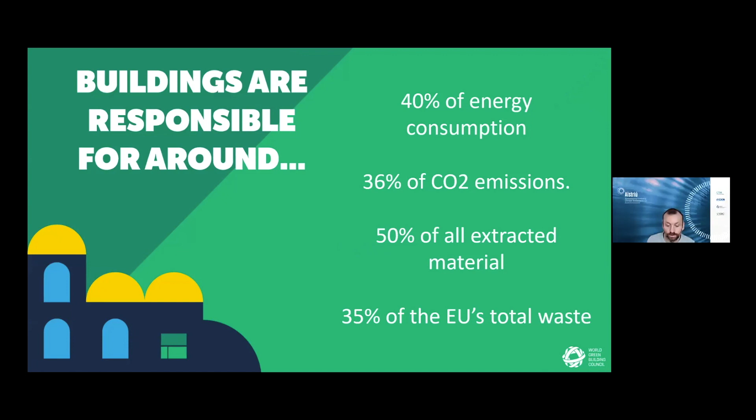Now, we all know that buildings are pretty impactful. They account for about half of everything we currently mine out of the ground, about a third of all our emissions, and about a third of all of the EU's waste. When we talk about whole life carbon, we're referring to the carbon emissions in the building materials, as well as those caused by energy use in the building during its useful phase. And it's these materials that I really want to highlight today.

London now requires whole life carbon assessments for planning permission. It's been written into the new London plan, and this is starting to proliferate as other cities follow suit. Finland is aiming for net carbon neutrality by 2035. There was a Chinese announcement at the end of last year announcing their net zero trajectory for 2060, and the US has just rejoined the Paris Agreement. So you can see how this is only going to become more important.

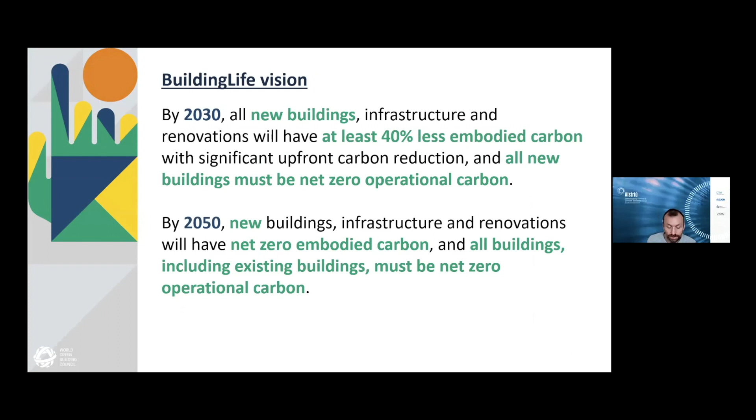Currently, the EPBD only looks at the energy use of our buildings, the operational energy, but of course, a building doesn't just appear. Its whole life cycle is much more. And although the operational energy is usually the greatest emitter in a building's life cycle, as we build better, more efficient buildings, this operational energy becomes less important and the other aspects of the building become just as important.

So I modeled a typical concrete block house, and this is what a new A2 rated home would look like today. I'm going to show you a few charts, but they're all based on this same data, just displayed in different ways. Today, an electric heated home with an A2 rating, which is 50 kilowatt hours per square meter per year, would have a carbon cost of around 9 kilos of CO2 per year.

This factors in everything: electricity generation and transmission, the fossil fuels that are still used in the grid. The National Planning Framework has a target of 500,000 new homes by 2040, and these all need to perform at this A2 rating. So as the grid decarbonizes and becomes more efficient, we would expect the 9 kilos in this operational energy portion to reduce.

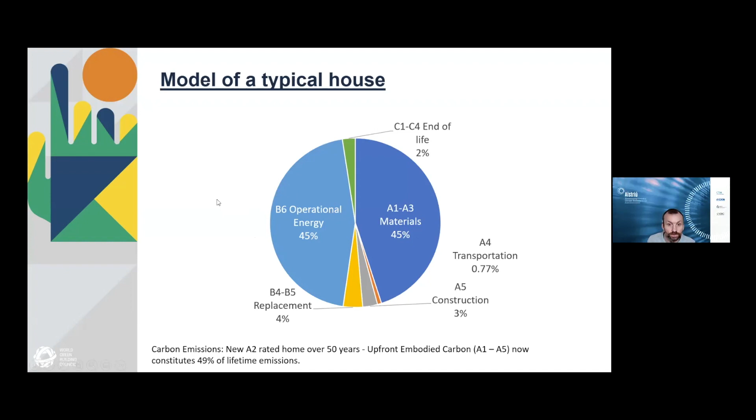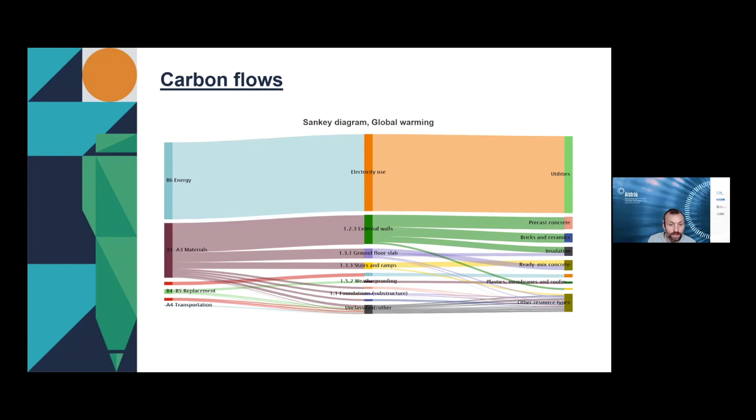Now, the problem is they are happening right now. They're not spread over the future and based on a decarbonizing grid.

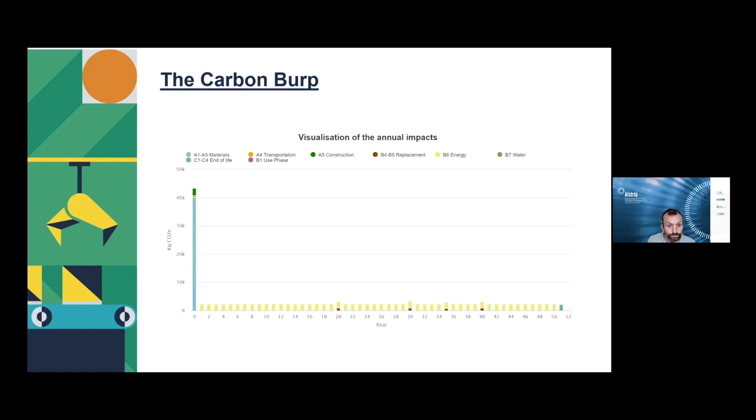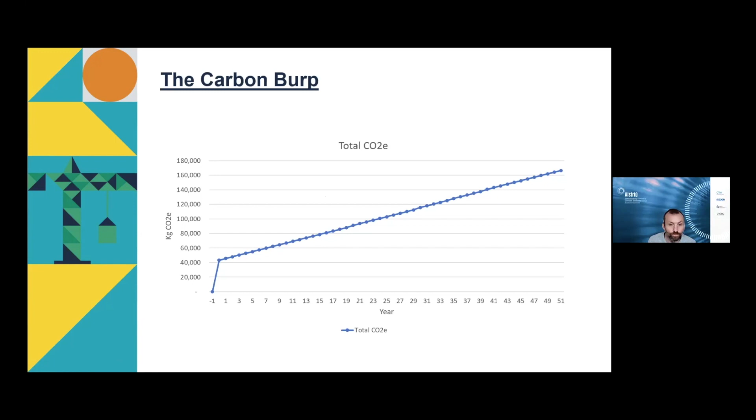So the problem, we're not really aware of our own impacts. So I'm going to try to relate them to something that we're all more familiar with. The average car sold in Ireland in 2019 produces 122 grams of CO2 for every kilometre driven.

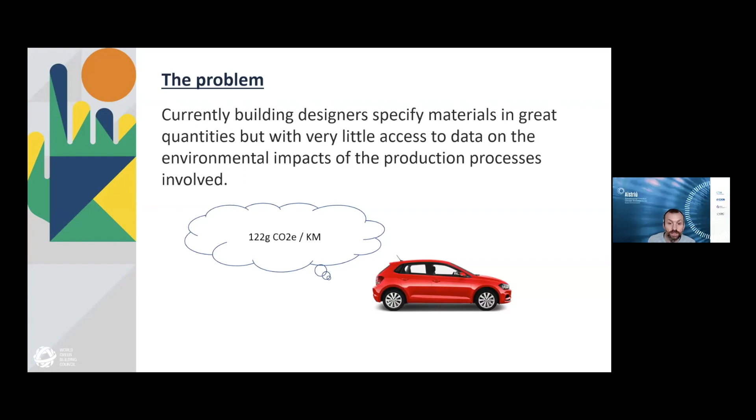So we're going to take a look at some of our key building materials and see how they stack up with this. So here's our car, 0.122 kilos of CO2 for each kilometre. So if you compare that to a kilo of concrete, a kilo of concrete is about the same as driving your car 800 or so meters down the road.

I should say that throughout this, there is variance. Just as you would get variance depending on the model of your car, there'd be variance in the concrete and all the other different materials that we're going to look at based on the energy mixes used to produce them or where the raw materials were sourced from. But everything I'm using here today is an average drawn from groups of comparable EPDs or modelled using average background data.

So here we have a brick, just one brick, the same as driving your car about almost 4 kilometres. And I'm told that we use about 70 million bricks every year. So that's about 250 million kilometres of bricks that we use every year.

The mortar that holds them together, just 1 kilometre. And concrete blocks, the same as driving 46 kilometres in your car. So you can see what I'm trying to do here. I'm just trying to show you the things that we take for granted and give you an idea of what it really takes to get them ready for site.

So back to our car. Now this slide highlights the importance of recycled content. A kilo of structural steel beam requires more than 3 kilos of CO2 emissions to produce, but this can be reduced drastically with increased recycled content or looking into alternatives. And of course, alternatives sometimes come with extra benefits.

So a kilo of timber will sequester over a kilo of carbon dioxide. It draws the carbon out of the atmosphere and uses it in its growth phase and leaves that oxygen element where it is.

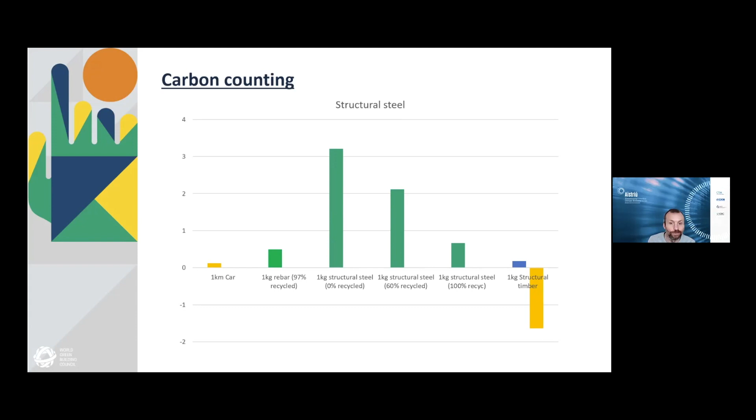So aluminium for facades and windows, it's great for weatherproofing and it's light, it's infinitely recyclable, but the production method requires huge amounts of electricity, even when some of the content is recycled. It also comes with some other pretty nasty side products too. There are great pools of this useless red sludge dotted around the world as a result of our aluminium production, but they're out of sight, so they're out of mind.

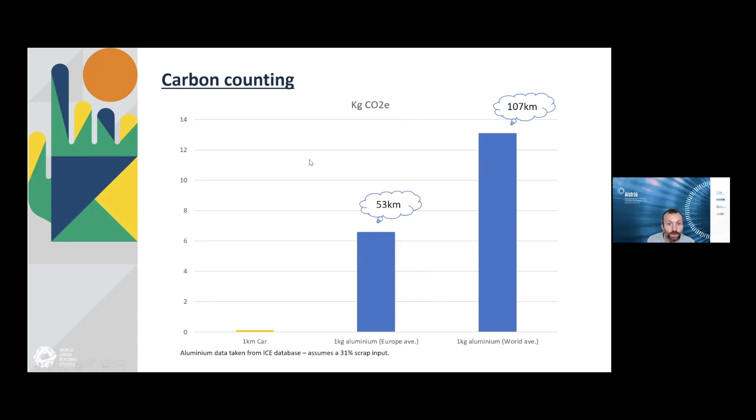Last one, our insulation. So wood fibre has about the same carbon cost as EPS, but it also absorbs carbon as it grows prior to harvesting. So this cubic metre could balance out around 860 kilometres of driving emissions, even after you take into account the emissions that it cost us in producing that cubic metre. So this sequestration is important and we need to hold on to it as long as possible. We need to think about how we can reuse it after this building has served its purpose, after it's deconstructed. Because if it's incinerated, then the sequestration is lost and we're back to square one. I think Mirko's going to talk a bit more about buildings as material banks and the circular economy. So I'm just going to leave that there for the moment.

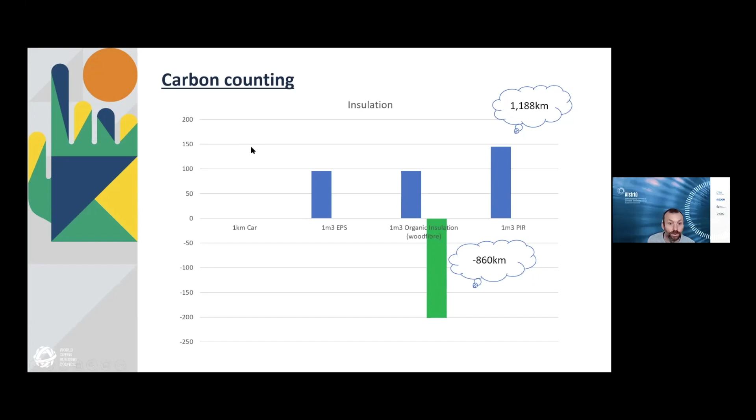Now, everything I've shown you has been simplified, and there could be 100 other reasons for choosing or not choosing a specific product. But I just wanted to clearly show the difference in one property, the carbon cost. All the materials' other properties would also influence the decision making.

This final bar chart shows an external wall build-up using CLT and the same external wall using cavity concrete blocks. This one's in percentages, so the worst performer is 100% on each chart. And you can see in the first chart, the GWP, global warming potential, this is the carbon, that can be reduced by 70% by switching to CLT, but there are other environmental impacts. The CLT performs worse on the ozone depletion potential, for example, in this case.

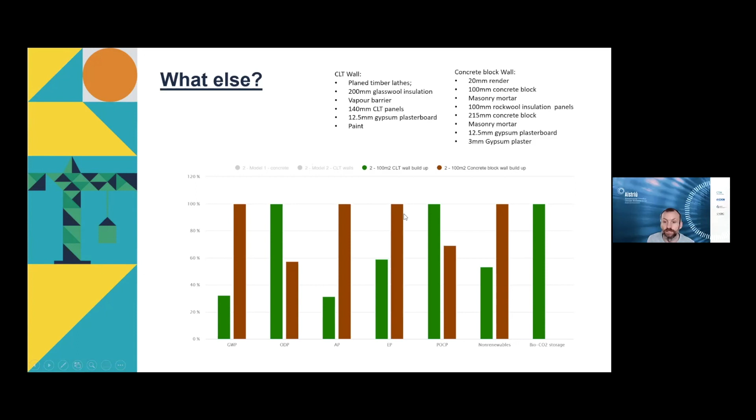The carbon indicator is usually a good indicator for the other impacts, but it's not certain. So we have to tread carefully. And you can see on the right there that the CLT obviously does have that sequestration benefit too.

So where do you find all this information? So everything I've run through is based on data. I've used averages, either the average from a group of EPDs or a result of a generic LCA study of the material. Using an average at the beginning of your building design, before you know who the specific supplier will be, can give you an indication of what your final result is likely to be. But data varies hugely across manufacturers, across regions, and across time. So there are a few things you need to keep in mind.

The best source of data of a building material or a product is the EPD, the environmental product declaration. And this is what we would like to see building designers and specifiers demanding from their material suppliers. We want to see these becoming a real differentiator in the decision-making process. And the most accurate information you'll get is from an EPD that covers a specific product from a specific plant. So use that once you know that that product and that product alone is definitely being used in your project.

Failing that, there are EPDs that cover groups of products, either all from one manufacturer using a similar process, or trade bodies that produce EPDs to cover the products of all their members. But there's less certainty here. As you zoom out from a specific plant, then you lose accuracy. And the other thing is time as well. How old is your EPD? An EPD has a valid lifetime of 5 years. After that, it's deemed to no longer fully reflect what's going on in the production process.

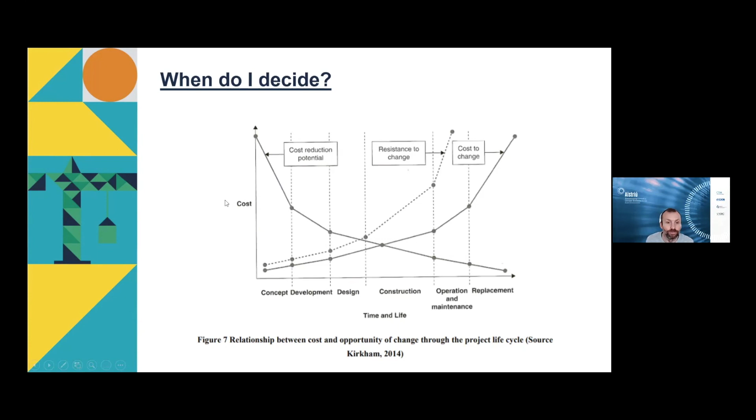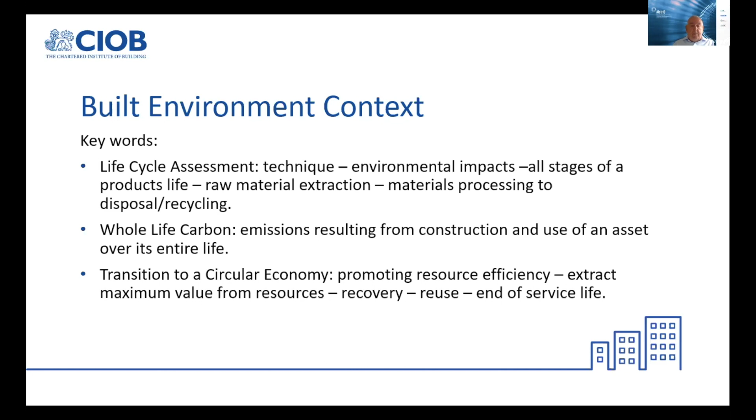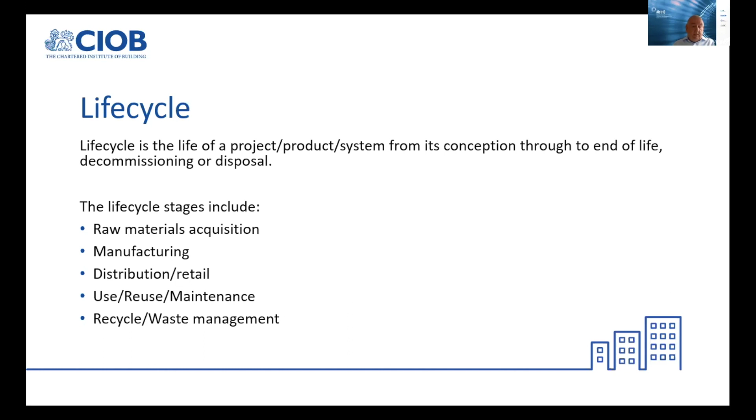The main purpose of life cycle assessment is to identify where improvements can be made to reduce the environmental impacts of a product or process in terms of energy and raw materials used and wastes produced. Next slide, please.

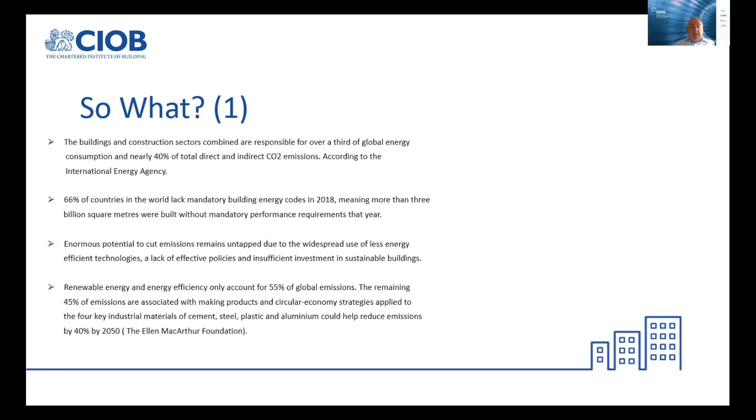The next two slides establish that there is a wealth of international briefing documents, statistics, and reports that communicate the issues involved in thinking about the required changes from business as usual. These are various research statistics that I have looked at researching for this presentation. The Ellen MacArthur Foundation was launched in 2010 with the aim of accelerating the transition to the circular economy. Next slide, please.

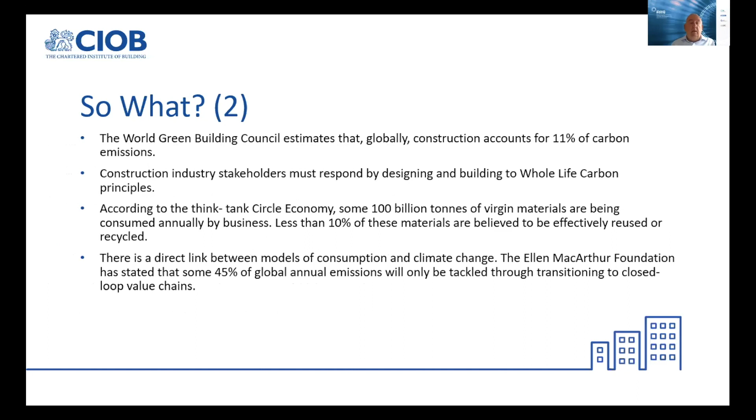Again, you've got the World Green Building Council estimates, you've got various think tanks, and again, there's an excellent report which is in the list of my recommended reading at the end of the presentation from the Ellen MacArthur Foundation on the circular economy. Next slide, please.

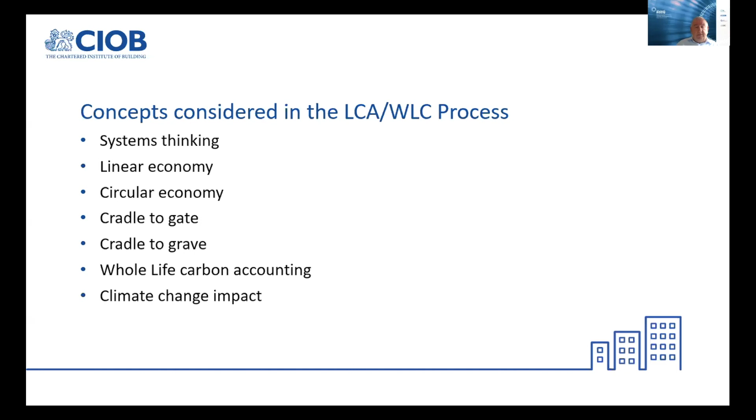Concepts that we've got to consider in this process are listed, but top of the list is systems thinking. That's extremely important, that we actually consider the design process as part of a system, an integral part of the whole system that is tackling climate change in terms of adaptation and mitigation and delivery of buildings and assets that will contribute to changing the status quo and moving on to a decarbonised path at net zero. Next slide, please.

The more sustainable world is largely dependent on rock-borne substances called rare metals. According to Guillaume Pitron in his book, which I've referenced at the end as one of my recommended reading lists, The Rare Metals War, the potential demand for rare metals is exponential. We are already consuming over 2 billion tons of metals every year, the equivalent of more than 500 Eiffel Towers per day.

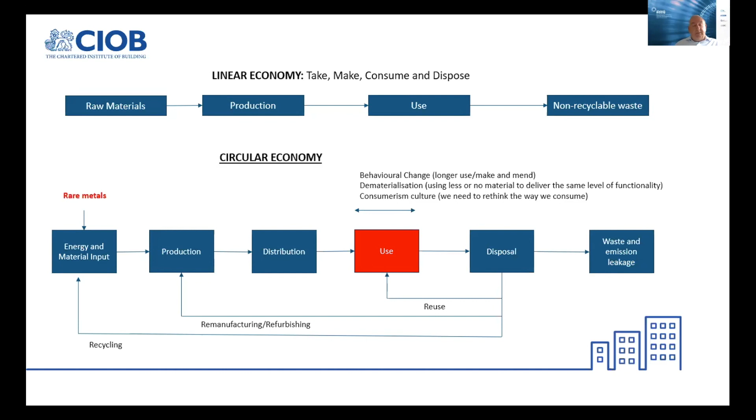We'll get onto this later in the conclusions, that we've got to change the way we consume. Because if we don't change the use within the economic model of the closed loop system, we're not going to achieve much in terms of meeting any targets. It's the human element of what can be a design problem, but design is an integral part of a larger system. Next slide, please.

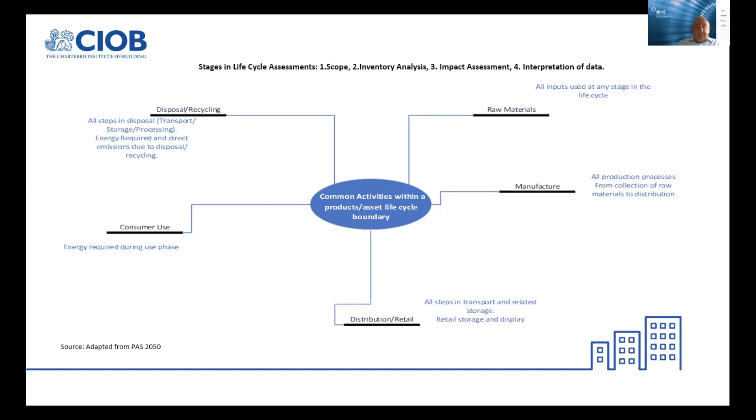What I mean by that is that, according to Aristotle, and I've got no reason to doubt him, the whole is greater than the sum of its parts.

Life cycle and whole life carbon thinking is part of a larger system that will help us understand both embodied and operational carbon within the built environment system, which is a subsystem of achieving the net zero carbon targets, whichever country you live in. The UK Committee on Climate Change's sixth carbon budget includes industry sector pathways to net zero for the manufacturing and construction sector, which is a system within itself.

But what is important is the system boundary, because if any part of the system contained within the boundaries is changed, all the other inputs and outputs will also change. Next slide, please.

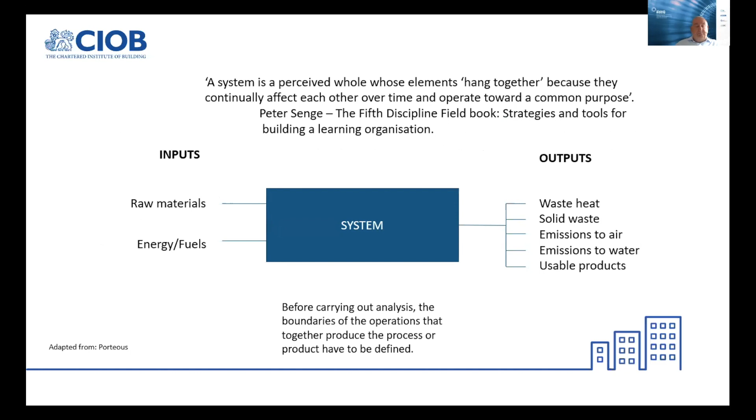Inventory analysis involves the collection of data about the products or services being investigated and the quantification of relevant material and energy inputs and outputs.

Impact assessment generally involves evaluating data collected on the material and energy inputs in terms of their potential environmental impact. The interpretation of data combines the findings from the inventory analysis and impact assessments to allow conclusions to be drawn and recommendations to be made.

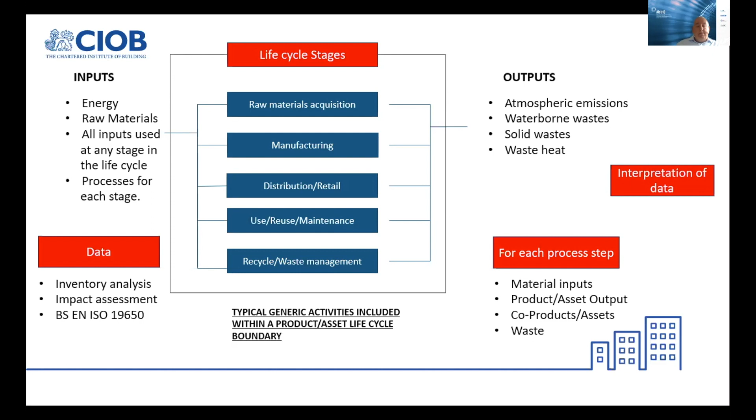Embodied carbon is sometimes referred to as capital carbon, referring to the emissions associated with the creation of an asset. In terms of buildings, the embodied carbon used to create a building may be as high as 62% of its total whole life emissions for some building types. As was mentioned previously, the relative significance of embodied carbon is increasing as both the grid decarbonizes and operational emissions decrease due to increased efficiency, according to the UK Green Building Council.

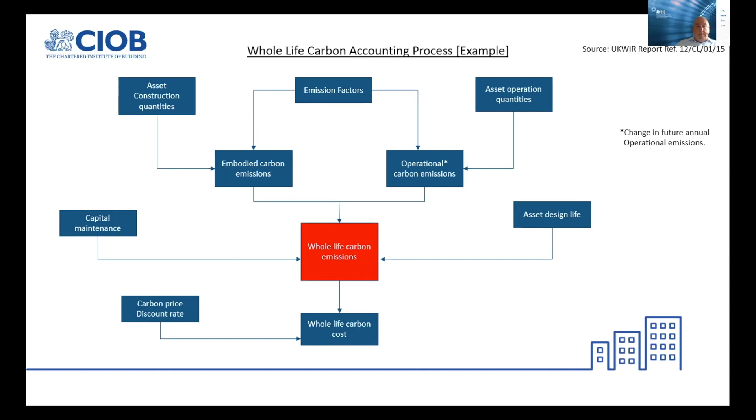Next slide, please. The CIOB has published the Code of Practice for Project Management for Construction and Development. Within that document, an excellent document of best practice, briefing note 2.01 on sustainability issues recommends key actions, and those key actions involve life cycle impacts on materials and equipment, which must be considered by the project team, as well as the selection of construction methods.

Another key action is to make the project team aware of the principles of designing for deconstruction and consider the whole life of services components for recycle or reuse at the end of their life. This is part of a series of briefing notes, best practice checklists, designed to make sure that all elements of sustainability in terms of project management are considered by the project team.

So this is now being embedded within best practice formally rather than via CPD and training courses. This document should be the Bible for a project manager in construction and development. Next slide, please.

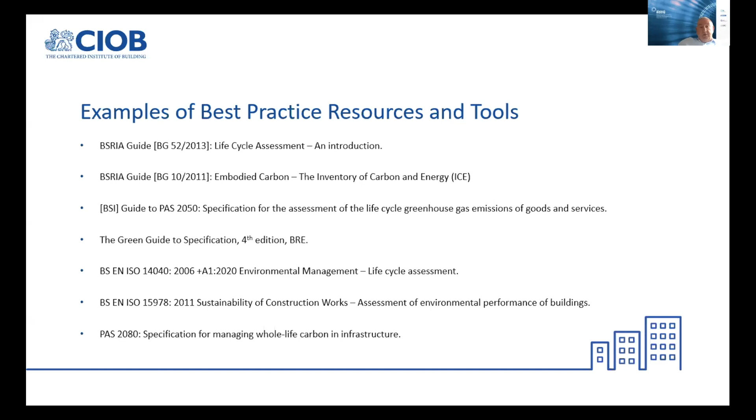The Green Guide to Specification by the BRE, ISO standards, and PAS 2080, which is the specification for managing whole life carbon in infrastructure. The list is not exhaustive, and there are common elements of these resources, tools and techniques that apply across the board. Next slide, please.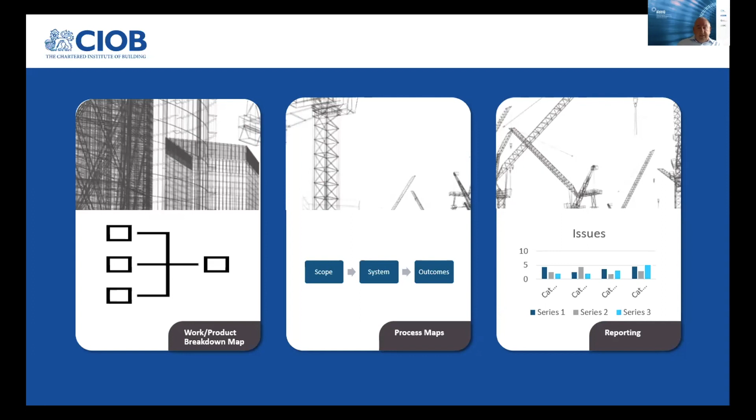These are required tools and outcomes that bring the thinking process into reality. Work/product breakdown maps, process maps, and reporting are crucial in terms of the exercises that have to be done. Again, there are lots of tools and techniques. I've just chosen those three because they are fundamental to the process as a whole. Next slide, please.

There are many databases and services listed on the internet. The process is well established. These are some example tools that you can find on the internet. It includes BRE databases, and various other national and international databases in terms of what supporting tools you can actually discover and use on embodied energy and carbon, environmental impact indicators.

The BRE Impact Database for construction products has probably 350 data sets that are compliant with the British standard, which is compliant with the EN standard 15804. So it's out there. There's tools out there. It's not really the question of the tools. It's the thinking behind the tools, and that thinking actually is a small component on a system and subsystems to achieve the objectives of impacting on climate change.

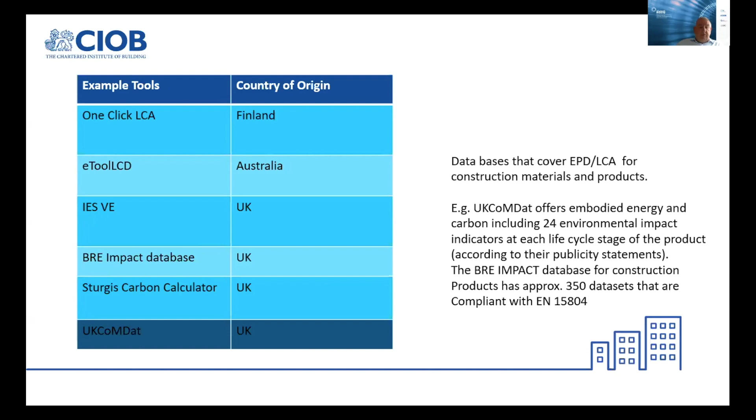Next slide, please. So what do we make of the thinking behind life cycle and whole life carbon? What does it mean? The key drivers moving forward must be keeping up with innovation, digitalization and communication, systems thinking.

Personally, we have to keep abreast of the situation and developments through continuous professional development and behavioural change. We're talking about people here, and there's a danger of getting too technical, talking about the mathematics of design, designing embodied carbon and considering operational carbon. But we are talking about people and their behaviours. What's changed in general behaviour, what's changed in business as usual. And basically, a really big impact that is not usually considered is the consumers of the results of various exercises on life cycle and whole life carbon.

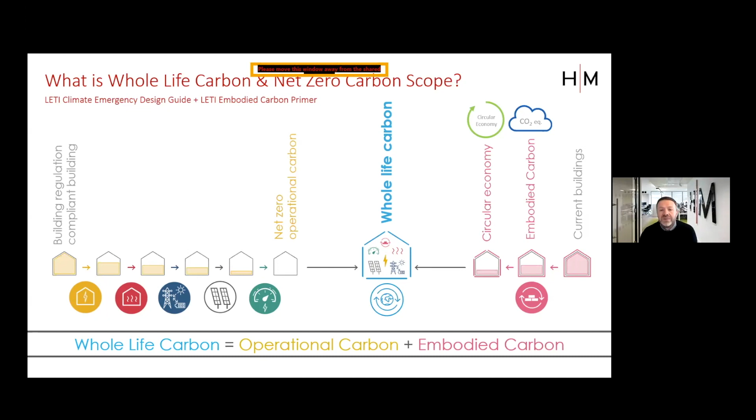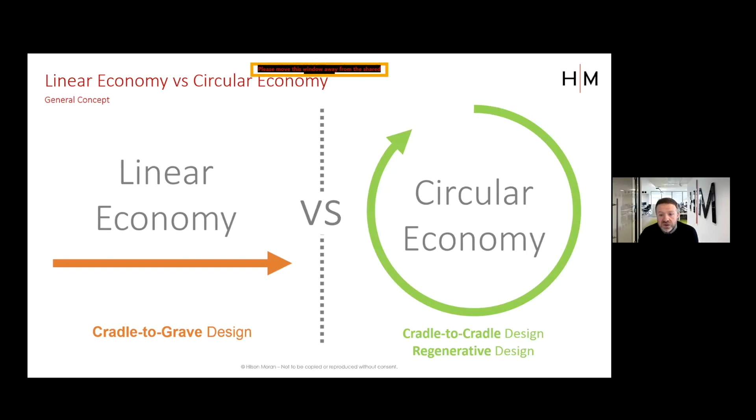What we basically recommended was that every building, from now on, should be built using reused material, and a big part of the building elements should be reusable at end of life, so that a group of building elements could be used in next lives. We are in this transition period at the moment, because we are basically in a system called the linear economy, and gradually shifting to what is called the circular economy.

This is a more in-depth visual for explaining the concept. As David and Stephen have anticipated, what you can see here is that the top is the linear economy, which is typically taking resources from nature, using all the resources for production of products, use, and then waste everything.

The circular economy concept takes into consideration that resource extraction should be minimized, and at the end of life waste should be minimized as well. What is possible to achieve those two aspects is to basically keep as much as possible of products and building parts within the loop.

All of these actions can be done by going for a few strategies, in terms of building element systems and so on. It's possible to do maintaining and repairing building parts, perhaps reusing building parts within the building throughout its life. It's a good idea to go for remanufacturing of building elements, and recycling is another very good aspect for it.

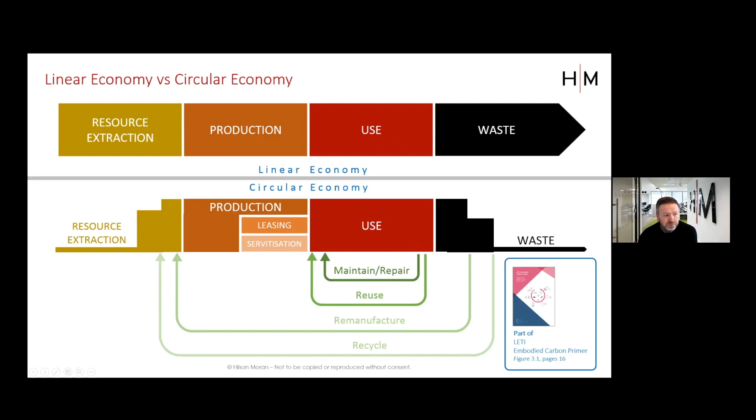If you'd like to read more about all of this concept, you can double check the LETI Embodied Carbon Primer, which is available online. Going to the next slide.

I'd like to introduce this project because it was a very interesting project I was involved in when I was at BRE between 2017 and 2019. I was mainly involved in this research project, funded by the European Union, as the life cycle assessment lead for the environmental evaluation module of this project, called Building as Material Banks, or BAMB2020.

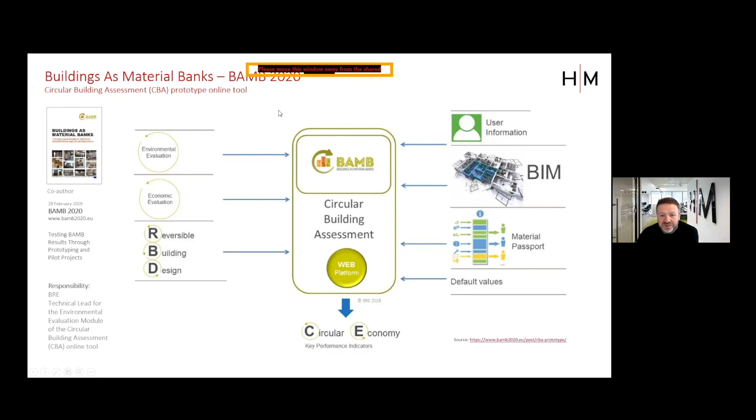In the meantime, I was working on this project. There were a few pilot projects that were going to be developed, and particularly one of the pilot projects was this particular building.

Which is called the BRIC. And this particular building was basically designed to be fully demountable at the end of life.

And of course, the main goal was that it would be possible to reuse the majority of the parts of the building for building another building at the end of life.

Now, the main goal of this research project, particularly for this pilot project, was that the building was able to be built.

For example, as the configuration of BRIC 1, then to be demounted at the end of life, and then of course to use all the parts coming from BRIC 1 to build BRIC 2.

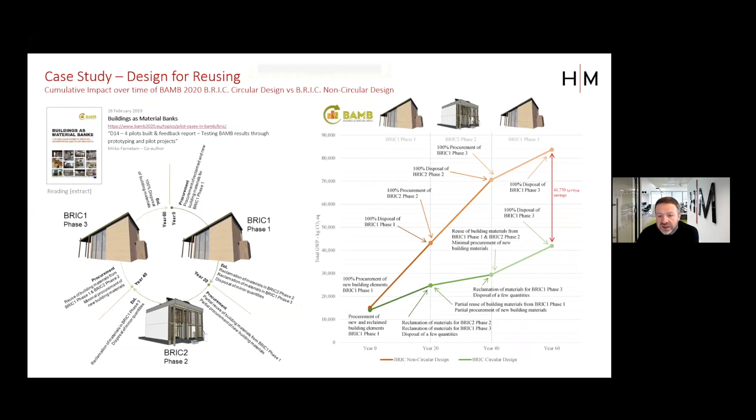But in this case, obviously, it is applied to a real case study, let's say so. So in this case, we basically were appointed by a client that basically would like to have...

They would like to apply, you know, cradle-to-cradle principles for developing new buildings in their portfolio.

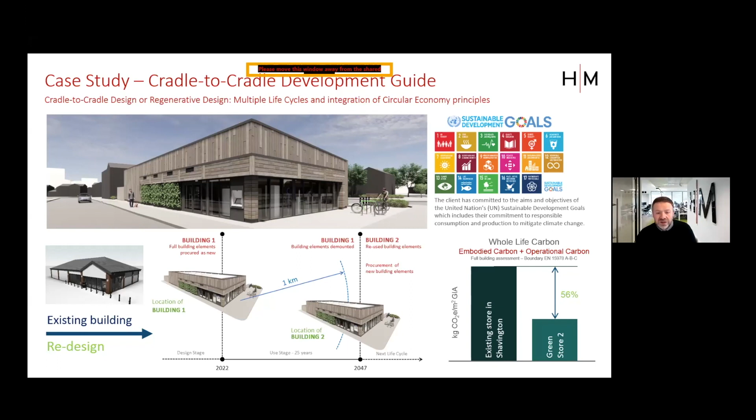But I think what is important as well is that there will be an economic benefit, because if this building here is built by an owner and occupier, of course, the capital cost will be high at the beginning. But in building the second building, the capital cost will decrease drastically because a big part of the building elements will not need to be sourced. So together with embodied carbon saving, there will be capital cost saving as well, and I think this is very important for a developer.

And that's it. Thanks very much.

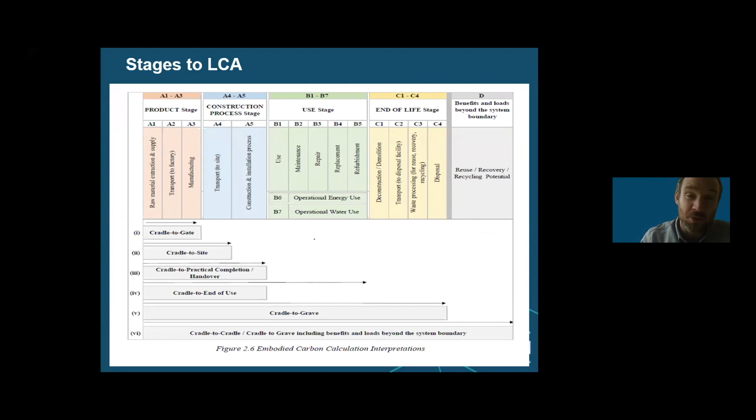So that is what we're essentially concerned with from a construction and operation point of view in relation to our life cycle analysis. Looking at embodied carbon - why is it becoming important?

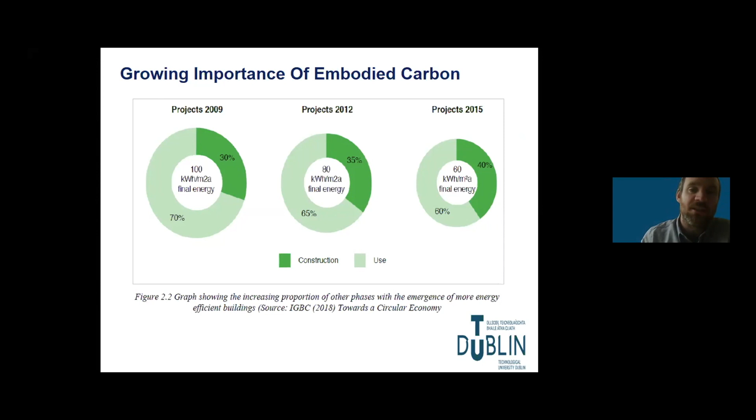As we sort out - and I'm not saying we have sorted out, certainly not in our existing construction or building stock, but from a new build point of view - as we move towards more of a zero carbon operational point of view, embodied carbon on our new builds is becoming more and more important. We could get zero carbon from an operational point of view, but if we're using a lot of steel, a lot of concrete, the embodied carbon in our buildings could be quite excessive. So embodied carbon is becoming more important, because what was the majority of our carbon produced through the operational phase is now getting dealt with. Our embodied carbon in terms of the manufacture, construction, and use during construction of those building materials is becoming more and more important.

Just to give you an idea of embodied carbon at the moment - this is a 2017 analysis of an office building versus a warehouse versus a residential construction, over what I believe is a 60-year period in terms of a life cycle analysis.

The embodied carbon of your office building is again about 60% of the overall carbon content, which includes the whole life operational carbon as well. Warehouse is a good bit more, and that is probably to do with the building materials used, be it steel construction or concrete construction.

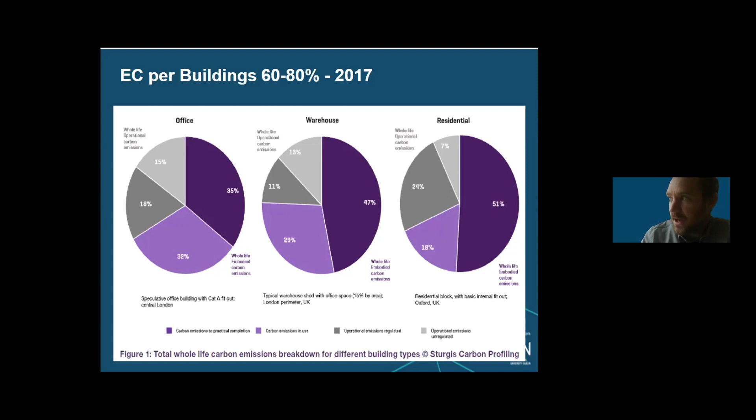And your residential is up there about 70%. So between 60 and 80%, embodied carbon with new builds is pretty much the focus now, as we get sorted in relation to operational carbon. So as quantity surveyors or construction professionals giving clients an idea of one building versus another, in terms of a more sustainable option versus something more traditional, we're using building materials that tread lightly on the environment.

What kind of methodology should we use? Well, the RICS, the Royal Institution of Chartered Surveyors, I'm using their methodology in lieu of something that possibly isn't completely related to my profession, using their direction. They're saying to use the breakdown structure that we use as quantity surveyors in our elemental breakdown, which is quite useful because that's the way we put our cost plans together.

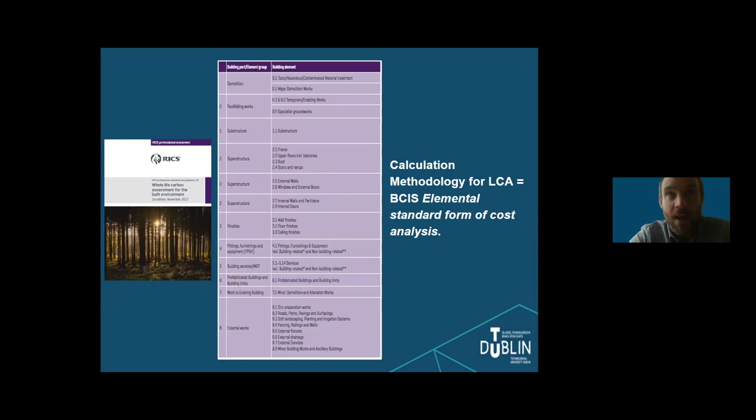That's the way we put our bills of quantities together. So if we have that information and that quantification, what we're trying to do is essentially use an embodied carbon unit rate, rather than a monetary unit rate. So we have the methodology already, we've been doing it forever, and it's just a matter of changing that practice a little bit for carbon counting.

So this is a bill of quantities, might be a little blurry, apologies for that. But essentially it's a good detailed breakdown structure. The units on the left-hand side are assigned a quantity, and then obviously they're assigned a rate, and that rate times the quantity gives us our cost.

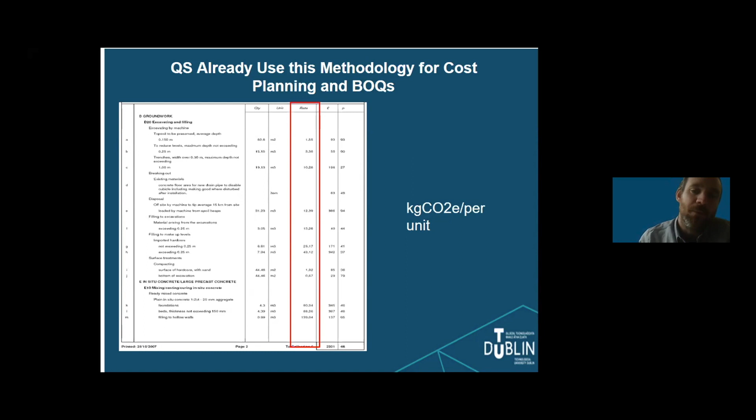So if we imagine using a kilogram of CO2 equivalent per unit, multiplied by its quantity, that will give us that unit cost for each particular item. So as quantity surveyors, if we take it on an item by item basis, because we've already got our bills of quantities and our cost plan, we can pretty easily and quickly build up a bill of quantities for embodied carbon.

This kind of just outlines digitization and where we might go and how we might leverage it. Again, a bit of a pet interest of mine from a digitization point of view, your building information model. There are plugins to the likes of Revit that you can use that have databases attached to them.

So certain software like One Click LCA gives us the opportunity to assign embodied carbon content to our object properties in the model. It makes it a lot easier, using these models, to quickly assign carbon content to the objects in the model and then run a simulation that outputs the carbon content.

Before that, we would have had to quantify per a 2D takeoff, generate a quantification, assign a unit rate per that unit like I just showed you, and build up our embodied carbon cost plan like that. But with building information modeling and digitization, this whole process becomes a lot easier to calculate the LCA on a particular project.

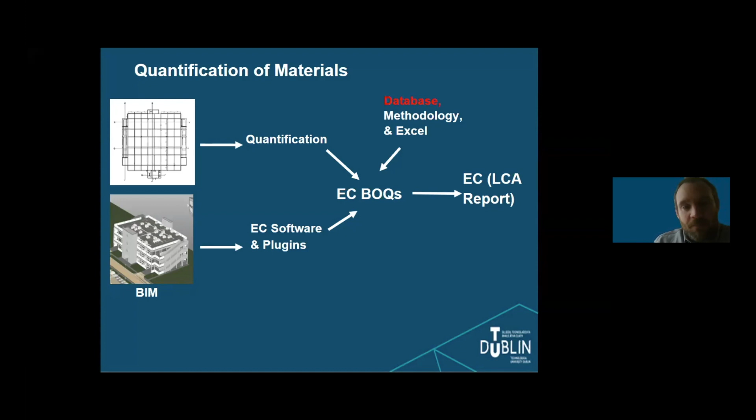So where do we get the information? As mentioned before, from a QS point of view, we can get it from generic databases like the ICE, the RICS in conjunction with WRAP, and the United Kingdom Green Building Council also have a database. BRE is a database in the UK too. And of course, we can get the actual specific information if we can attain it in relation to the EPDs.

So in Ireland, we have an EPD platform from the Irish Green Building Council, and it's just getting started. I believe there's a certain amount, I don't know exactly how many, maybe 50 or so, maybe more now, EPDs from certain manufacturers and suppliers on there, and hopefully that will grow over time. The more EPDs we have, the more data we can get and apply to our embodied carbon calculations. So that's a useful repository. What do they look like? Well, there are a number of different metrics in relation to an EPD.

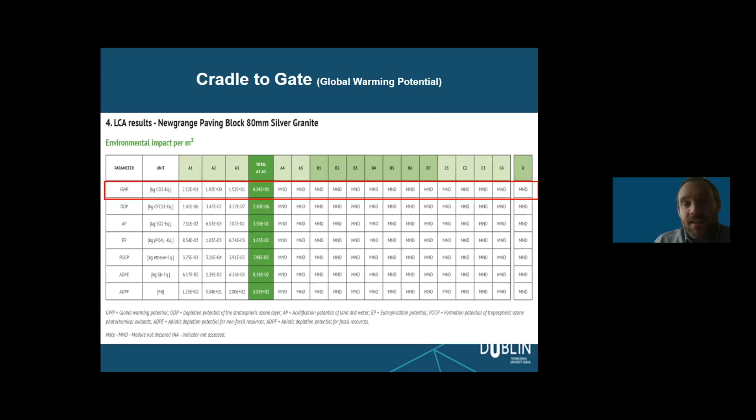So calculating, I know I'm out of time really, but I'll run through these last couple of slides quite quickly. Calculating embodied carbon based on the RICS methodology, both the 2012 version and the 2017 version, can be done quite easily, as I said before, because we've got the bill of quantities. Essentially what we're looking at is the units.

We're looking at the elements, which would be maybe a cavity wall construction. We're looking at the outer leaf, the inner leaf, and we're assigning basically an embodied carbon calculation to each unit in that particular element, so to speak, including our insulation and our wall ties. We're adding them together and we're coming up with basically a kilogram per CO2 per meter squared or meter cubed, depending on the building material.

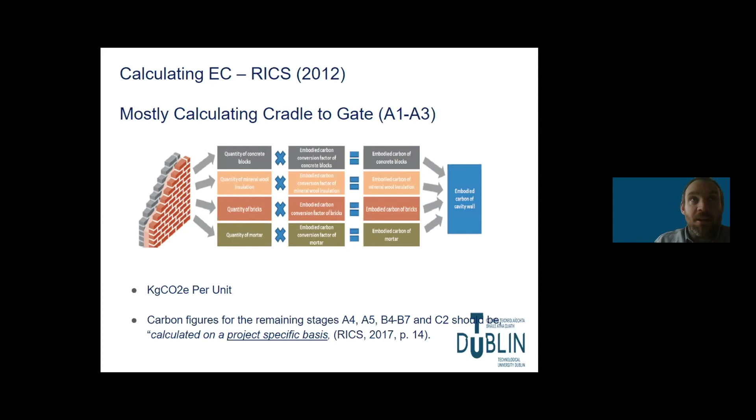As I said before, most of our analysis are really from the A1 through A3 stages, that cradle to gate, but again, we're being pushed into the realms of cradle to grave now, because that's really the meaningful calculation that we have to come up with in relation to what the embodied carbon content is through the whole life cycle analysis stages, not just your cradle to gate.

This is an extract from a student of mine who did a fantastic thesis last year, Aoife Morris from Kerrigan Sheanon Newman. She basically took a bill of quantities and instead of assigning your cost per unit, she assigned an embodied carbon kilogram per CO2 emission unit to each particular item in the BOQ. And she was able to look at the benefits and challenges in relation to that.

The real benefit is we have the BOQ and it's getting access to the data, and the more we have that data, be it through EPDs or through generic databases like the ICE, it's not as challenging for quantity surveyors or for anyone doing these things if they can get their hands on a BOQ or a cost plan in terms of quantification. It's a matter of assigning unit rates to that.

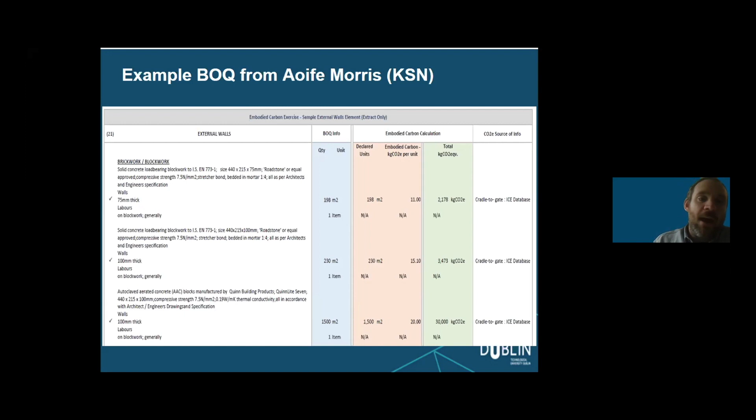And there is very good software out there that can help in this regard, like the one-click system that the Irish Green Building Council utilises. That's a fantastic system in relation to doing quantification and utilising models and coming up with an embodied carbon calculation on a particular building, on a particular project.

Just a couple of things. Not all the elements of the building need to be focused on. I mentioned before that a lot of building materials, as has been mentioned before, are carbon hotspots. So your foundations, because they're concrete, your external walls and internal walls, because they're blockwork or concrete, your frame, because they're steel or concrete, your windows, because they're possibly aluminium or PVC - these are the carbon hotspots of a building.

And you can see from your regular 3-bed semi-detached house in Ireland here that between your poured concrete, your concrete elements, your steel, you've got again, you know, 50, 60, 70% of the embodied carbon of that particular building.

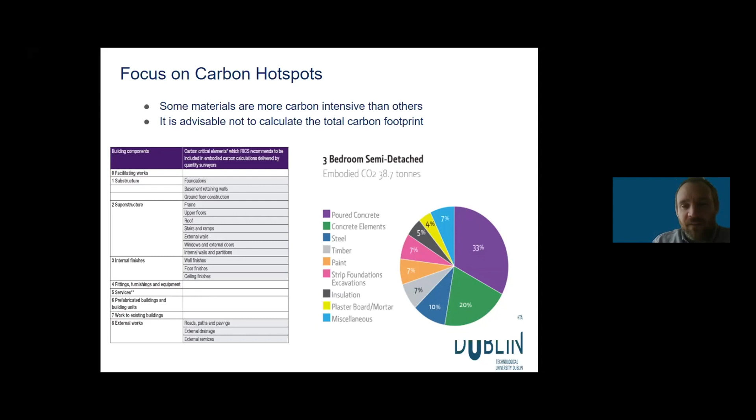So to start with, if you focused on maybe the substructure, the superstructure, and even possibly some of the mechanical, be it the ductwork, etc., and some of the finishes, that's the 80-20 rule of quantity surveying, 20% of the quantities will give you 80% of the cost. Well, same could apply to your carbon counting, so 20% of the quantities is essentially 80% of the carbon, and that would ring true with this statistic. So from a QS point of view, or a carbon counting point of view on a project, measuring sustainability, those are the materials to focus on, and the methodologies allow for that, rather than looking at every little tiny bit that could take an awful lot of time but doesn't really add a whole lot of value.

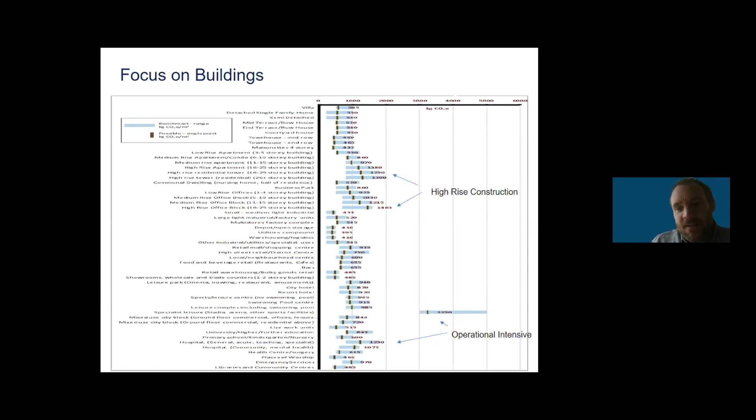Focus on buildings - this is an extract from the methodologies from the RICS, and it's your high-rise construction that really has a large bearing in relation to the embodied carbon content of those particular buildings, because they've got the steel and the concrete and the frames that have to go with it, and obviously the elaborate mechanical systems that need to be accommodated in buildings like that. So they're above average. Also, buildings like sports facilities and hospitals are above average in terms of their embodied carbon content. So it's possibly even more important to focus on embodied carbon in those particular buildings than it may be in house construction, which is quite average in terms of the data that comes out of those particular types of buildings.

So that's my presentation. Delighted to be part of this series, and if anyone has any questions, I can share any part of that presentation with you. By all means, give me an email, dermot.kehily@tudublin.ie. Thank you very much.

Thanks a million, Dermot. Actually, Dermot, before you mute yourself, let's go retrospectively back to the questions. A question that was just posted while you were speaking was: the use of bill of quantity type information to calculate embodied carbon suggests that the design is already complete, but it would be instructive to do it at a much earlier stage. How would you undertake such an assessment at a very early design stage when the key decisions are required to be made?

Yeah, that's a good point. So you could do it just like you do your cost planning, giving your client an idea of cost at different stages of the design and beyond. The same would go, and possibly more important from an embodied carbon point of view - there was a slide on there I took out because I knew I had less time than I anticipated. It's just like cost: your real ability to affect the cost of a building is as early as possible, at the early stages of concept design. The same goes with embodied carbon. So it's those decisions at the early stages that have the greatest bearing in relation to embodied carbon. So at that stage you'd have to leverage whatever documentation you have, be it conceptual drawings, early mass models, building information models, and quantify it as best you can.